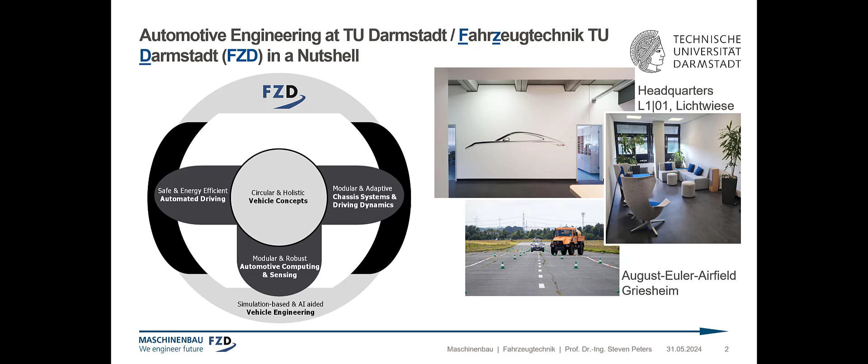So why are we dealing with automated driving? What's the purpose? We see a lot of potential benefits for customers and society, so individual customers and the society in general. Let me start with the most promising business case from my point of view, which is logistics. And here we see a huge push, especially in the US, due to driver shortage, which will be quite similar in Europe very soon. To keep our logistics and supply chains stable without increasing the prices for our daily goods, we need automated trucks because we don't have enough drivers willing to drive the long distances.

Also public transport is facing driver shortage. Trams, buses, all these things are very difficult to staff, and this leads to an increase in prices of course.

The second one is safety. Maybe this is what you at first bring together with automated driving. Of course, we would like to have safe systems. I would not promise that they are safer than human beings because human beings aren't that bad. There are of course some issues like drunken drivers or very tired drivers. Of course, this is a very bad thing and we can reduce these risks, but we don't need automated driving for that one. I believe that the way towards automated driving will help to increase public safety, because we get more and even better assistance systems, ensuring that we can really help drivers in almost all kinds of difficult emergency situations.

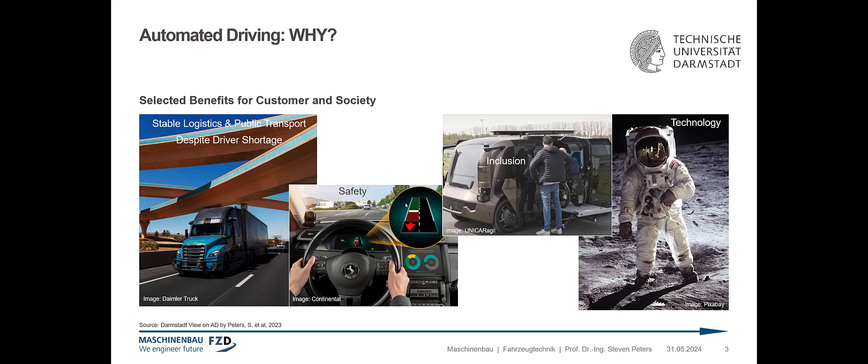Let me introduce some definitions to you. When we talk about automated driving, we have to talk about the operational design domain, which basically defines under which conditions and where a system can fulfill a given automation level. I will come to the level later.

And this ODD refers to conditions, day or night, possible velocities. Is it possible to drive during rainfall or snow and all these things? Where means on the highway or on urban roads in a particular country, or even in a particular, let's say, facility like an airport or something like that.

The SAE level defines the level of autonomy of a system, starting with level 0, which basically means there's absolutely no help, no automation. We have driver assistance, partial automation, which usually is driver assistance in the longitudinal and the lateral direction. Then we have the conditional automation, where you can use the system in automation mode in very tiny particular conditions. Then we have the high automation and the full automation. Basically level 5 is a vision. Nobody believes that we will achieve that anytime soon.

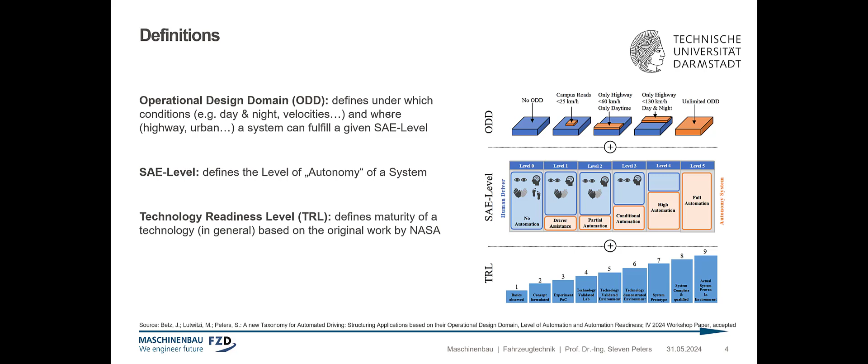And then we should talk about the technology readiness level, which basically comes from NASA too, but can be derived in all different kinds of industries and applications. We have designed an automated driving readiness level, and you can see a little bit more about that in the IV 2024 workshop paper by my distinguished colleague Johannes Betz and Melina Lutwitz.

This is a usual AD stack, just to make you a little bit more familiar with how we structure the next slides. We have a sense part where we have all the sensors, including the vehicle sensors and the map, where we do the perception task with and without machine learning. We have the fusion, and we come up with a model of the environment. This is handed over to the planner, where we do the route planning, the behavior planning, and lastly the trajectory planning. All is based on the model of the environment, including a prediction.

Of course, we predict how other road users might behave in the next time step, and are looking for the most likely case or the risk minimal case. In these terms, it would be the worst case for us, of course. And the act part, where the controller is controlling all the actuators.

So where are we today? The vehicle industry has had its moon landing. It's not too far-fetched. Everybody in the industry and science is relating to that, and this was really something impressive. Mercedes-Benz has presented their Drive Pilot Level 3 system in a minimal risk use case that's very reasonable, and the ODD is very small. But even if it is very small, everybody is referring to this as a moon landing.

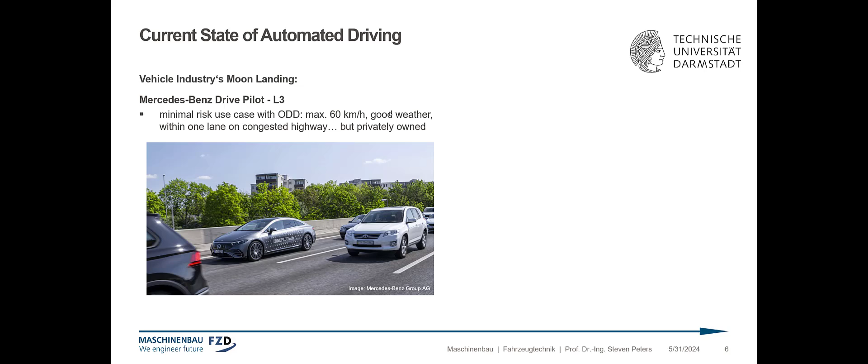We have a velocity of maximal 60 kilometers per hour. We need good weather conditions. We are only driving within one lane on a highway, which should be congested because you need to see the next car in front of you. But these cars are privately owned and operated. Mercedes-Benz is selling these cars to end customers in Germany and in selected states of the US. In the meanwhile, BMW is doing pretty much the same.

On the other hand, we have the computer industry's moon landing, which is not better or worse, it's just another case. Here we have a very complex use case, a more complex ODD, as we are in a city, driving in ordinary city traffic, without separated lanes or things like that, but only in very few selected cities, which are quite sunny, and it's operated by an operator, by Waymo in this case, the daughter of Google or Alphabet. So both have very limited operational design domains, but we also see different approaches of different industries with different strategies.

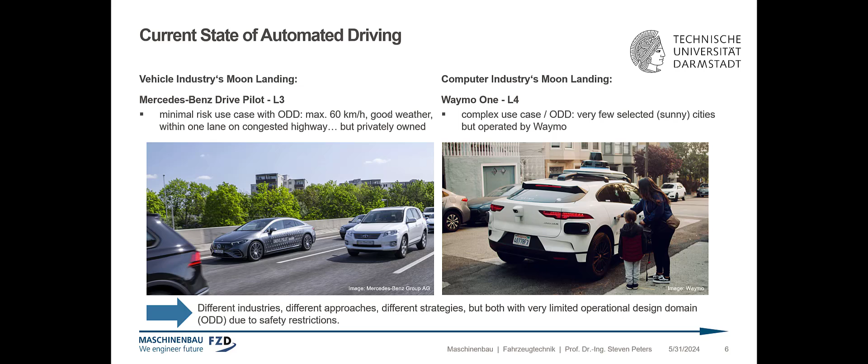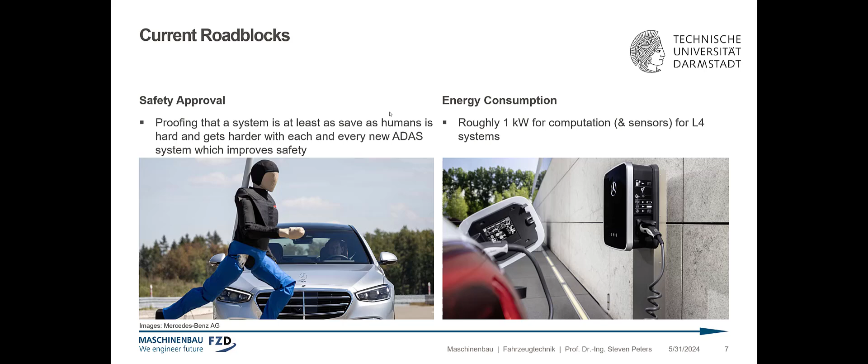So what are the roadblocks? On the one hand, we have the problem of proving that the system is really safe. I will start with that one. The other one is the energy consumption. Just imagine you have roughly 1 kilowatt for the computation for a level 4 system in your car. What is 1 kilowatt? With 1 kilowatt hour you could roughly drive 10 kilometers with a very modern and efficient battery electric vehicle. So this is a major concern, of course. You would lose a lot of your range. But let's start with the safety approval problem.

Some figures from statistics. Let's assume that automated driving should be at least as safe as a human driver. Frequently, it is supposed to have a system which is as safe as a well-experienced driver who is in good shape and mood. This is far more difficult. But let's stay with this. Just some figures, 10 years old, but it doesn't change too much. The distance between really fatal accidents, so with people dying, on German highways is roughly 660 million kilometers.

Now that's the distance between two fatal accidents on German highways. Let's do a statistical hypothesis test, assuming that the distribution of accidents, as they are rare events, is Poisson distributed. A null hypothesis which says the AD system is not safer than a human being. This would be the case that our test which we would like to do was just successful due to luck and not because of the real capability of the system.

Choosing a significance level as usual of 5%, which basically is the risk of rejecting the null hypothesis which in fact is true. The procedure would be: reject this null hypothesis if no fatal accident occurred during 2 billion kilometers of driving on a German highway. Then, if you have mastered this task, the chance that your system in fact is not safer than the human driver is smaller than this 5%. That's what statistics tell us. Or my colleagues Wachenfeld and Winner.

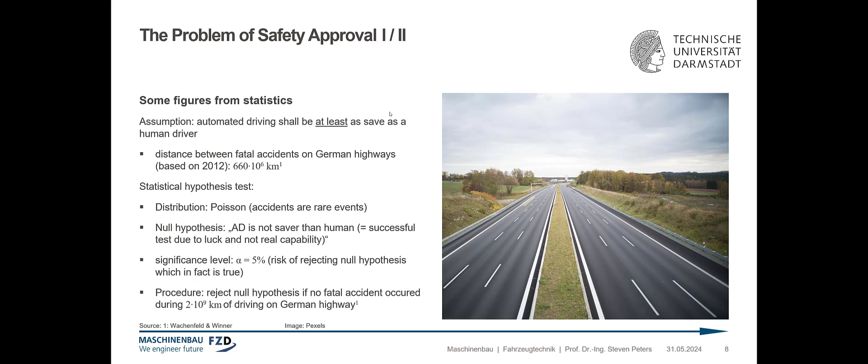So, how about driving 2 billion kilometers on German highways? No, it's not fun. This is a very expensive task, and you have to do this before you have the safety approval done. So that's not reasonable. You cannot drive 2 billion kilometers with a system you don't know how safe it is. So that's ridiculous from both points of view, from the safety point of view as well as from the economic point of view. So the statistical approach alone will not lead to mastering this challenge.

The idea is quite simple, and we have seen that for almost 10 years. There were a lot of rumors about Tesla, and the idea is quite easy. Let's integrate such a system in ordinary customer cars. Let the human being stay in charge and drive the car and observe our automated system, which is in so-called shadow mode with no interlinkage or connection to the actuators, so it's really risk-free, and look at what the human being is doing and what the system would do if it was allowed to. Okay, that sounds very good. And we also like the idea very much.

So we integrated an AD stack in a tram. Why a tram? The tram is driving in a very reproducible way due to the rail. And of course, we are facing basically all major challenges you face when driving through urban areas. And we found out that for these urban situations, there are so many issues, or let's say deltas, between what the system is doing and what the professional driver actually has done, that you really have to dig into the data with your human brain to find out whether this is a safety critical issue or not.

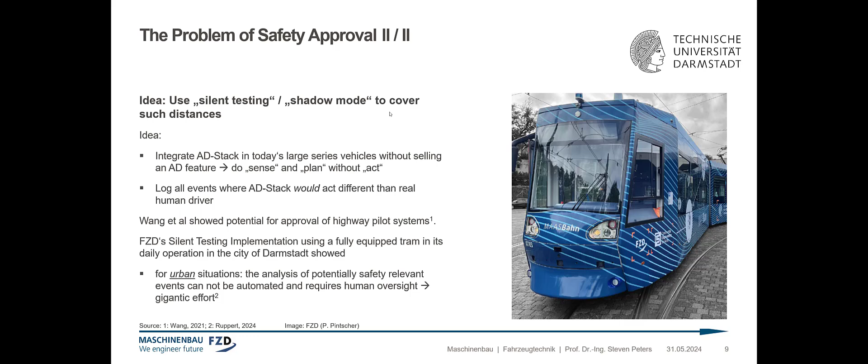A little bit more about this tram system here in Darmstadt. We have been driving this for more than 5 years, collected more than 70 terabytes of data, which of course is a big treasure for us, where we really can analyze what's going on in a city like Darmstadt. It's driving all through the year in normal, regular operation with an ordinary professional tram driver.

So, what is it now? We have problems with the statistical approach. Even when we use silent testing, it's not easy and cheap or efficient by any means, even when using silent testing in the city. So what's the way? What are we talking about? We have a desired behavior in our mind, and with our knowledge, we try to bring up a specification, and then we have a specified behavior. And then we implement this and have an implemented behavior. And hopefully all these three, desired, specified and implemented behavior, are congruent. But we can be sure they won't be at the beginning.

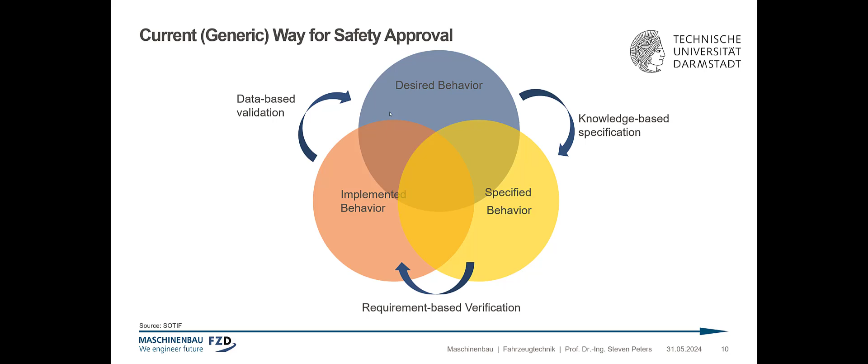So what do we need? We need a knowledge-based specification here to come from desired to specified. Then we need a requirement-based verification between specified and implemented. And then for the last one, implemented to desired, there data-based validation is the way to go. This is what basically comes from standards like SOTIF, and this slide is basically based on that. The illustration is inspired by the one of TORC.

Let me come to the second one, the energy consumption issue.

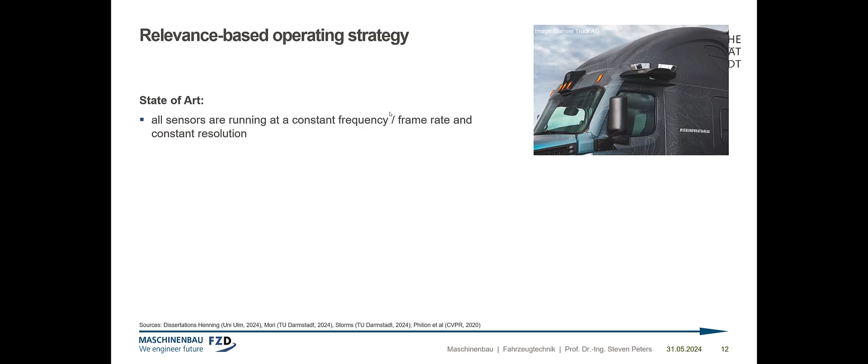First approach to tackle this would be a relevance-based operating strategy. The state of the art is that all sensors are running at a constant frequency, frame rate, and constant resolution, which usually is as high as it can be. There are some new approaches, like the one of Henning this year actually, and there the regions around the ego vehicle, so our automated one, are subdivided, and the list of the detected objects is subdivided into relevant and irrelevant, and you don't have to observe the irrelevant one. That's the idea.

So only use the relevant parts of the field of view to decrease the amount of data which has to be processed, because the huge amount of data to be processed is causing this huge energy consumption. The definition of relevance is based on the impact on a planned own behavior. So let's assume an object which does not influence the trajectory planning is obviously not relevant. That's the idea. It's inspired by Philion et al. and was further elaborated by Ken Mori and Kai Storms at my institute as well.

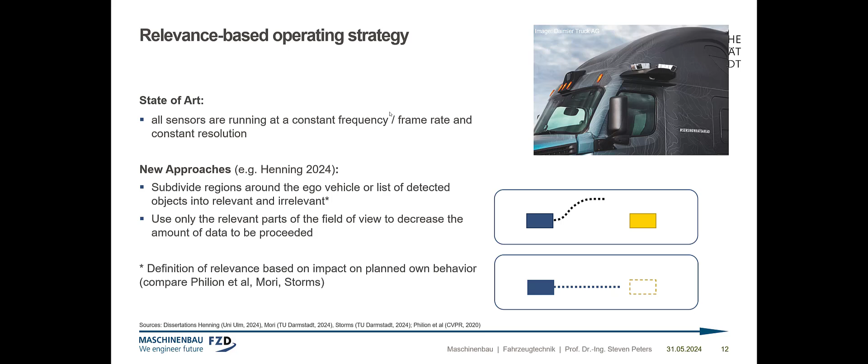So, but that's not enough. Let's propagate all uncertainties. Each and every sensor has its measurement uncertainties, which are situation dependent. LiDAR, for instance, can over or underestimate the distance to an object based on the weather conditions. A camera has different ranges, of course, where you can trust depending on fog and rain and all these things, and daylight, of course, or night. So we need all measurement uncertainties. We have to fuse them.

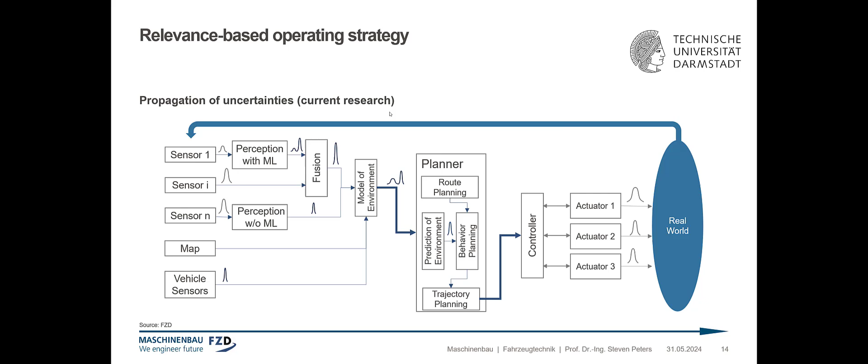Usually we are doing this to decrease the uncertainty, but naturally speaking, we need probability density functions for all the data streams in our process chain here, because only a few of them are deterministic. Most of them are not. So with that, we can enable our planner, for instance, or the fusion approach to really behave like a risk manager. What do I mean by that? We can make all decisions based on the probabilities, and we can demand or ask up and downstream processes to reduce uncertainties, for instance by adjusting the fusion strategy.

We need fusion strategies which can be adapted during the runtime in the customer car. So this is basically one of the core elements of a software-defined vehicle, being able to adjust an architecture during runtime, in the runtime environment. So maybe we switch from a redundant approach to a cooperative approach just for a few seconds. We lose redundancy for a couple of seconds, or maybe a split of a second, to be cooperative and find out more about the objects. And then come back to the redundancy.

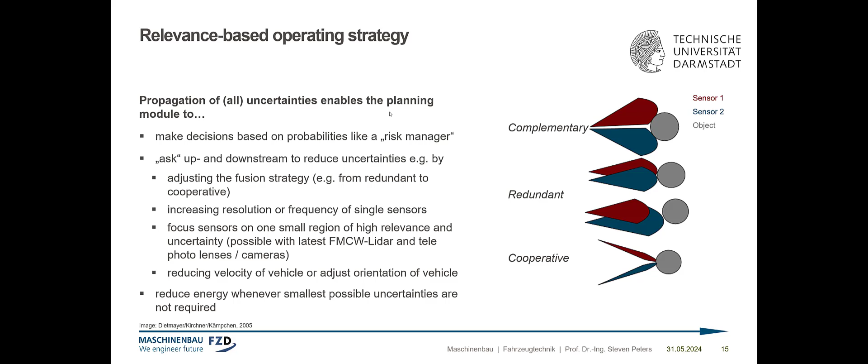Increase the resolution or frequency of single sensors, or decrease it when it's not necessary and the uncertainties are fine, to reduce energy consumption. Focus the sensors on one small region of high relevance and uncertainty. This is possible with the latest FMCW LiDAR systems and telephoto lenses of cameras to really focus on a field of view. This is basically what we human beings are also doing during driving. Or reduce the velocity of the vehicle, or switch a little bit the angles of orientation to see more of what really concerns us. And the other way around is reduce energy whenever the smallest possible uncertainties are not required.

A completely other approach, which is more the long-term way, is coming from the computer industry or from the chip technology. Today, all our computers we are talking about here are von Neumann computers. That means that we have a strict separation between the processor and the memory. So basically, data and calculating data are separated. They are interlinked with a bus, and the bus is the bottleneck.

Now we have something which comes out, among others, from the Human Brain Project of the European Union, which was a 1 billion flagship project, called neuromorphic computing, which is much more human brain-inspired, where we have the neurons and the synapses and the communication in much smaller units, and we have a lot of these units. So basically we are removing the strict separation of CPU and memory, bringing data and processing of the data together, and having it in small portions distributed across a huge area. And this was illustrated by Mercedes-Benz in a use case of artificial intelligence for the sake of energy efficiency in the Mercedes-Benz Vision EQXX, which is known as the most efficient Mercedes-Benz ever.

It's a concept car, not a series car. I was involved in this during my time at Mercedes-Benz, and my team was responsible for integrating a neuromorphic computing approach for the hot word detection of the speech recognition system, just to figure out when "Hey Mercedes" is said. That's the only task of the system. But this is of course something which is running all the time.